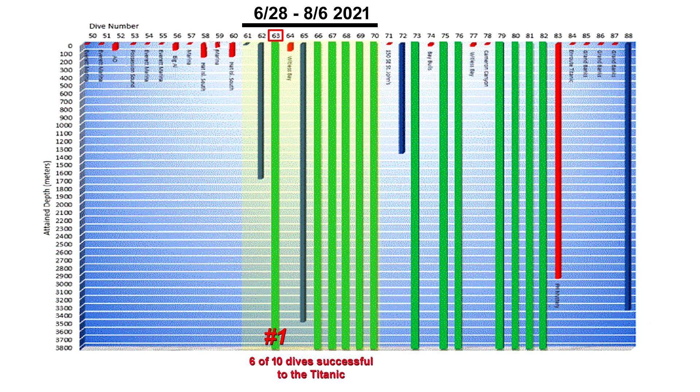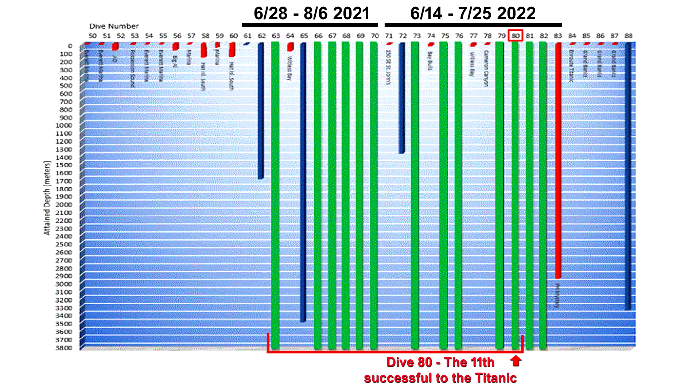The OceanGate dive logs have Titan successfully making it to the Titanic for the first time on July 9th, 2021, which was dive number 63. There must have been quite a celebration on the ship that night. When counting dives of the 2021 and 2022 seasons, Dive 80 would be the 11th successful dive to the Titanic.

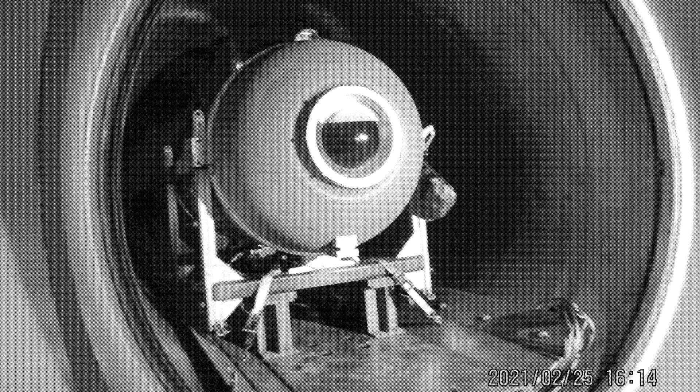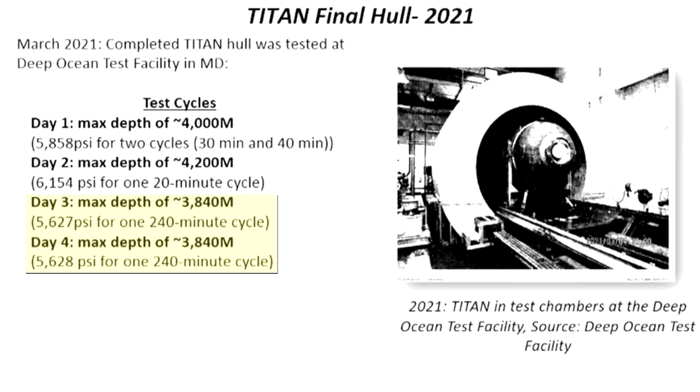If we want to count up how many times this hull was stressed to a deep pressure, up to and including Dive 80, we need to add an aborted dive in 2021 to 3,500 meters. And let's throw in the 4 test chamber dives completed in March of 2021 in the Deep Ocean Test Facility. These tests stressed the hull with simulated dives to 4,000, 4,200, and 2 dives to 3,840 meters.

So now we understand the number of pressure cycles the Titan hull completed at Dive 80. It was the 16th time the hull had been stressed to a deep pressure of over 3,500 meters. Now compared to the version 1 hull, which had fibers popping like crazy, the version 2 hull was very quiet in terms of loud pops of carbon fibers breaking. For fun and some perspective, let's play some clips discussing the first hull. Here's Stockton Rush talking about it during a talk in 2022.

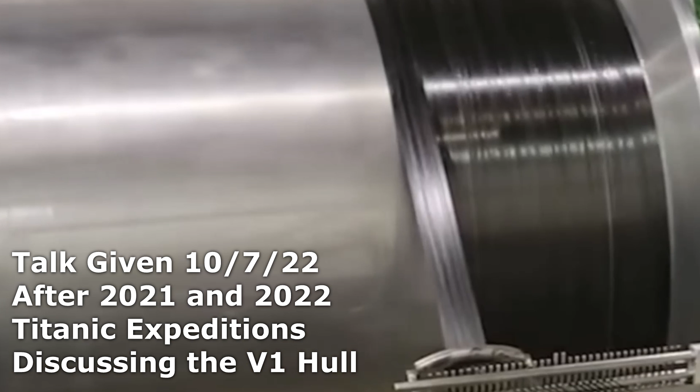We made one hull. I took it to 4,000 meters, and it made a lot of noise, which is a very sphincter tightening experience. And it wasn't getting quieter on the second dive. It should have been dramatically quieter. If you think about it, when you get to these maximum pressures, you get a lot of popping and crackling. And the next time you go to that pressure, you should have a lot less. All those weak fibers and voids have all been taken care of. And this hull wasn't doing it. So we scrapped it. We went back.

We built another one. Here is Stanley, who was on the second manned dive with Stockton during version 1 Bahamas testing. He is talking about the noises in an interview just a couple of weeks after the tragedy.

He told us before the dive to expect loud noises that he had heard on his first dive. He described them as fireworks. I would say small caliber gunshots, same difference.

This is Mr. Stanley discussing it during the Coast Guard hearings.

You know, the sound of a carbon fiber band breaking when it's in a 5-inch thick matrix is a lot of energy being released. And we were all clearly a little unnerved, but he had warned us. But you could actually tell when we got to deeper water the cracking sounds would amplify, which is even more concerning. There was kind of like a grand finale of cracking sounds as we were getting close to the surface, which, I'm not a carbon fiber expert, but just thinking about it logically, the only way that you get a whole lot more cracking when you're coming back up is stored energy that was then released as the pressure was released.

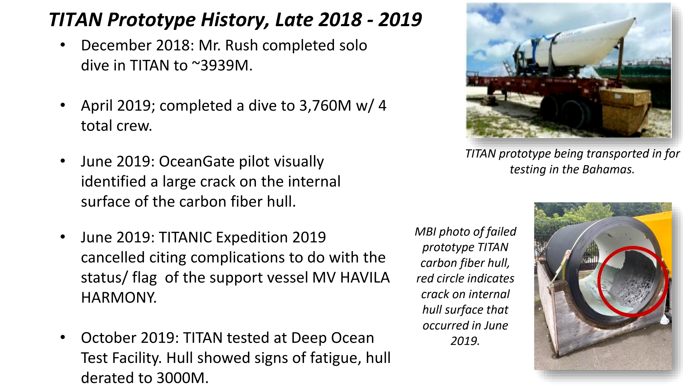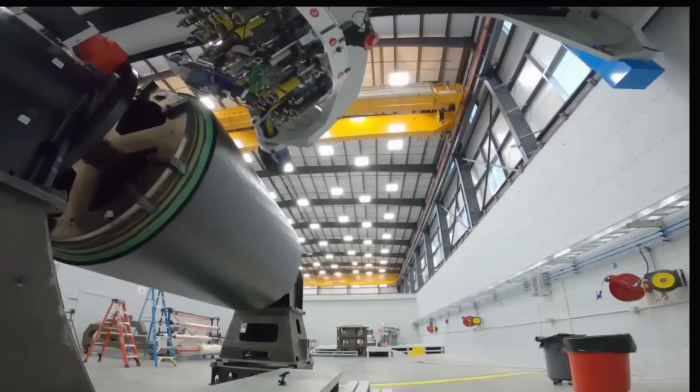Okay, the first hull was a nightmare. We all know that. We are going to circle back to something Mr. Stanley said, so keep watching. The second hull was nothing like this. It was behaving great in 2021 and 2022. It was really quiet. No fireworks or gunshots like we just heard was coming from the first hull. I'm sure that Stockton was thrilled with the new design.

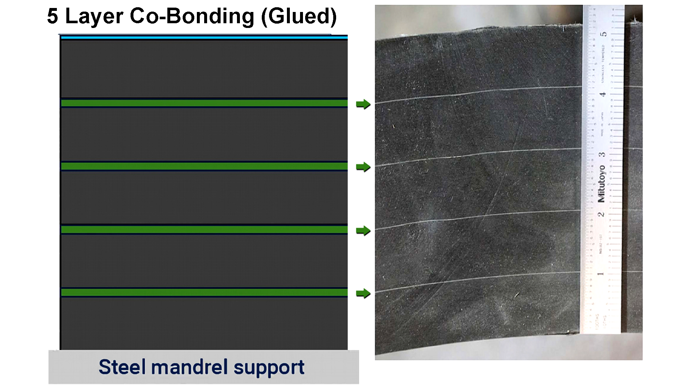He must have thought the co-bonded technique was a real success. The second hull was quiet, and Renata Rojas was a mission specialist on a successful dive to the Titanic on Dive 81 in 2022. This was the dive after the loud bang was heard. Here's what she said about the hull.

Did any noises like that ever occur on the dives you were on? No, the hull was extremely silent. And then throughout the dive, it's just silent. So you never heard any noises while you were... Not at all. You could hear a pin drop.

So again, if you are someone who thinks the hull was severely compromised during dive 80, note that the hull was really quiet and dove successfully after dive 80. More on that later. Now to the loud bang. Let's listen to 3 excerpts of testimony about hearing the loud bang. Here is Phil Brooks. Let's get his report first.

Were you aware of any acoustic anomalies that occurred either during any dive or upon surfacing? The only thing that I remember when we had the loud bang, we were pretty concerned about that, and that did produce AE activity. It was at the end of the dive after it had been on the surface for quite a while. It seemed like maybe 10 minutes or so, and that did produce quite a bit of AE activity.

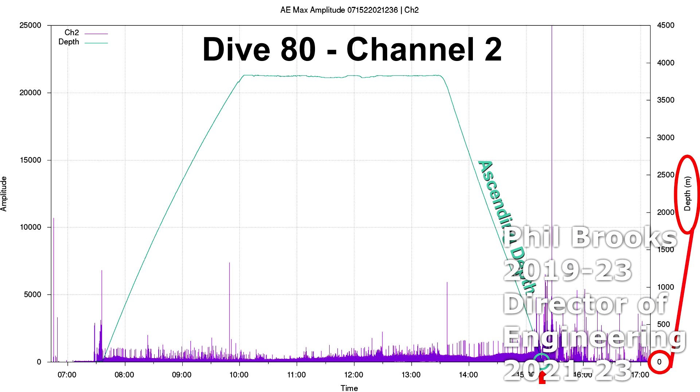Now, Phil Brooks said they were at the surface for about 10 minutes before the loud bang, and the acoustic data backs up that timeline. Look how the depth data shows them at 0 depth on the bottom timeline, but the acoustic event happens after they were at 0 depth for a while. Fred Hagen was a mission specialist in the sub at the time of the loud bang, and he describes the sound. Mr. Hagen's recollection of when it happened was probably incorrect. They were already at the surface.

Can you please describe what you heard? Well, we were ascending. I don't recall the depth. I think we were fairly close to the surface, but we were still underwater, and there was just a large bang or cracking sound. And of course, sonic events in a submersible are alarming, so we were all concerned that maybe there was a crack in the hull.

Let's hear from OceanGate employee Antonella Wilby. She had degrees in computer science and was working on a PhD and had ROV experience. She was very concerned and talks about Stockton's response to a customer who heard the bang.

About what you know about that dive. I wasn't aware until the next day that anything had really gone wrong. We were going through the debrief, and one of the customers stated that on ascent they heard a bang as loud as an explosion. I later spoke to some of the people who had been in the small boats helping with the launch and recovery, and one of them told me, I recall clearly, they heard it from the surface.

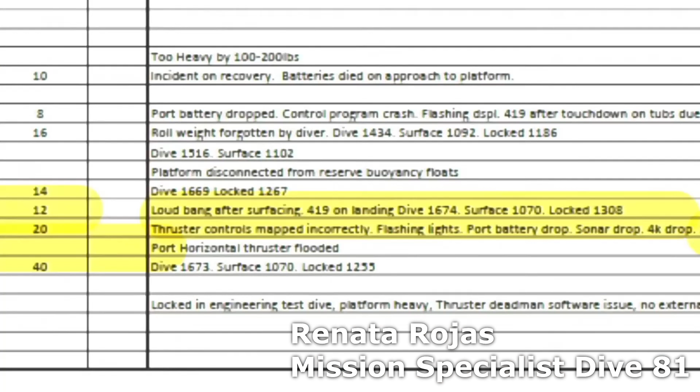In the debrief, it was explained to us, with the change of pressure as you come up, the frame, the top frame that holds the sub, and the legs that could actually be dropped have a little gap.

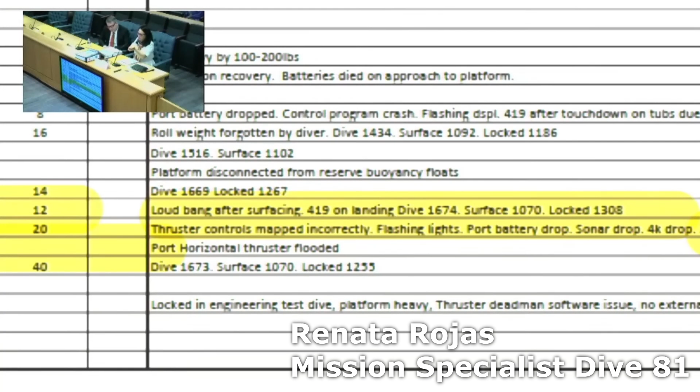And as they came back to the surface, it skipped a little in the change of pressure. And that was the noise they heard. I actually at some point said, I want to go see it. I went down, and you could visibly see the difference between the top of that frame and the bottom of that frame. It didn't seem like there was any damage to the hull.

And what did the OceanGate oceanographer and chief scientist think? What were your thoughts if you were diving in a subsequent dive? Did you have any concerns? Yes, I was concerned and asked their chief engineer, Phil Brooks, if he was concerned. He said that this noise was a concern and that the OceanGate team was focused on trying to determine the source of the noise, and that would influence whether we made future dives.

Did they ever provide you any specific analysis of the real-time monitoring system? No. Okay, we heard stories from the mission specialists and the staff. Let's see what Stockton was actually thinking as per the testimony directly from Phil Brooks.

Stockton did make a comment about the cause of this loud bang, and he thought it was the frame adjusting to the sub. As the sub goes down, it compresses slightly in size, and as the sub compresses, the frame does not. Since the frame is hard bolted to the rings, as it comes back up, the frame may have sprung slightly, and then it adjusted back to its original shape. And that was Stockton's theory of what that bang was: the frame readjusting back to its original shape.

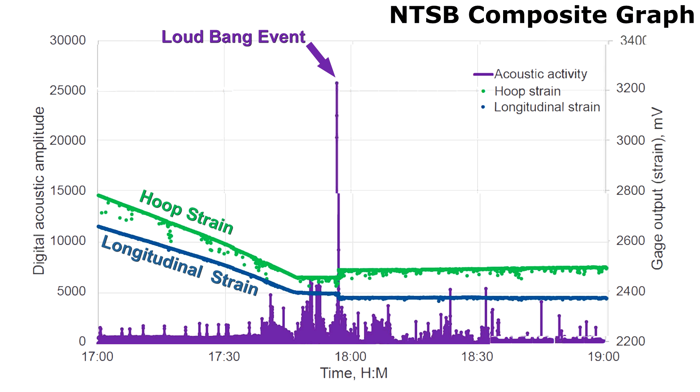So Stockton's explanation for the loud bang was the hull jumping in the frame, and you heard all the guests and some of the staff repeat that story. The troubling thing was Stockton and Phil had real concerns about the shift in the strain data, and they were not forthcoming with this information. The bang and the strain events coincided. Let's analyze strain on the sub. When plotted together, one can see that the sudden change in strain gauge readout coincides with the large acoustic event.

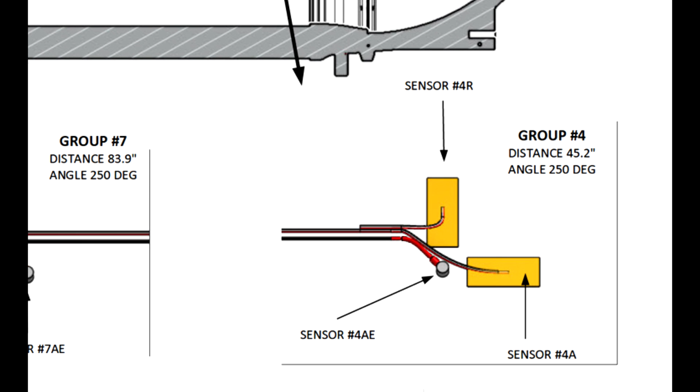Before we get into more testimony about Dive 80, this is a good time to discuss strain gauges, how they function, and how they were implemented in the Titan. This background information will help make sense of the remaining testimony. A strain gauge is a fascinating device. It's based on a fine continuous line of a conductor cut from foil. It works due to the fact that a metal conductor, when elongated under tension, changes the cross-sectional area to become less, which creates more resistance. This resistance is measured in ohms.

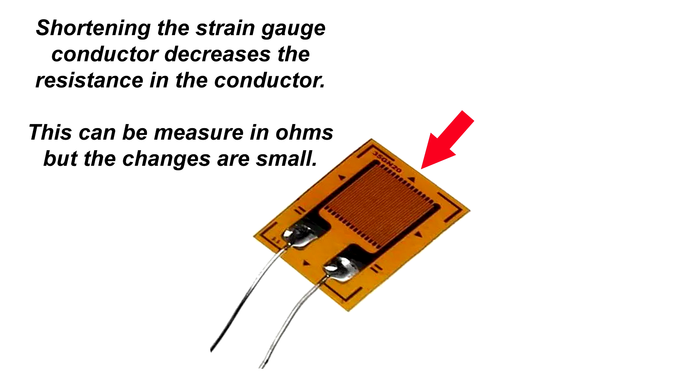The opposite is true. The conductor creates less resistance when it is shortened with compression because the cross-sectional area enlarges. When you bond the gauge to the surface of a structure for which you want to measure, changes in the length of the structure also change the length of the strain gauge. A single strain gauge has to be in the axis of the movement of the structure that you want to measure, and then there will be changes in its resistance, which would be measured in ohms.

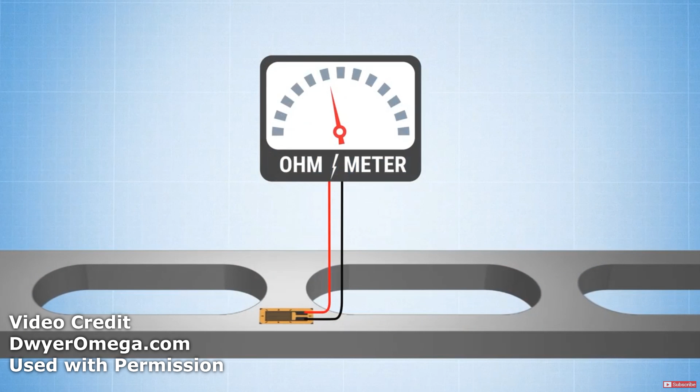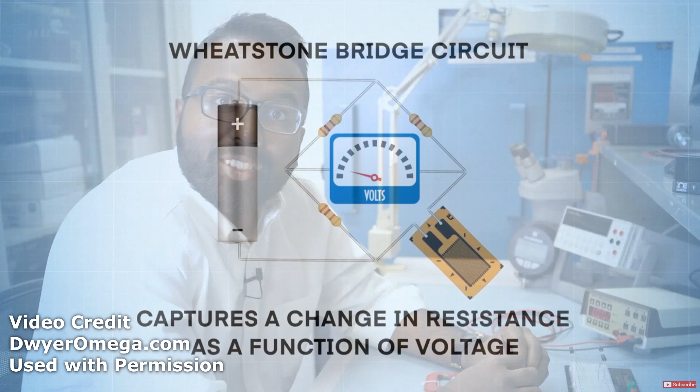But the changes in the resistance of the gauge, either increasing or decreasing, are so minute you could not effectively plot the changes. So the trick is to use devices that put the strain gauge in a circuit called a Wheatstone bridge. This converts the changes in resistance seen by the strain gauge to readings in millivolts, and this voltage can be amplified to get a range of readings that can be plotted effectively. Let's watch a strain gauge in a lab setting. This is a strain gauge bonded to a piece of metal, and one end of the metal is clamped to a table.

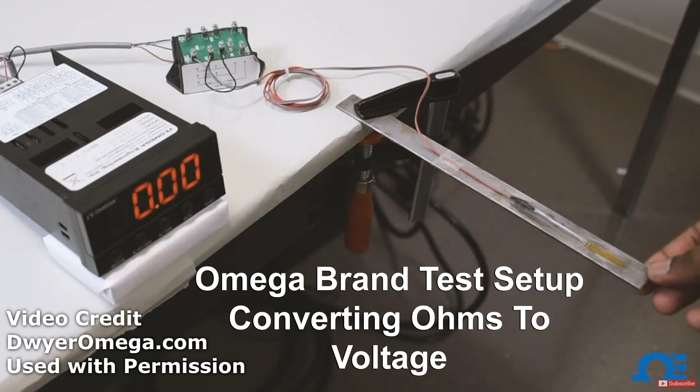This is a wider view showing the strain gauge wired to a commercially available Wheatstone bridge, and also a display that can show the millivolt fluctuations in real time. When the metal is pushed downward, this elongates the strain gauge, decreasing the cross-sectional area of the conductor, increasing the resistance in the gauge, and in this demonstration, they are representing the deformation in negative millivolts.

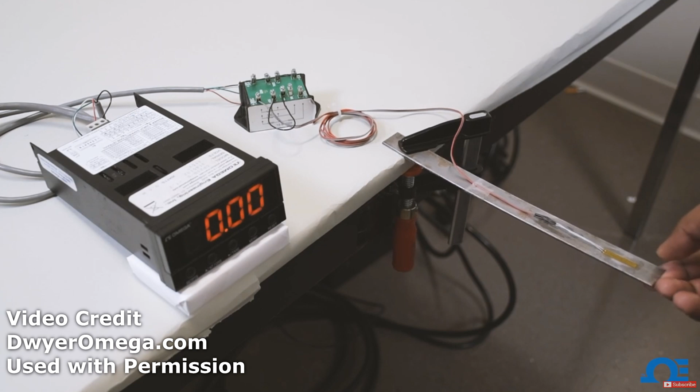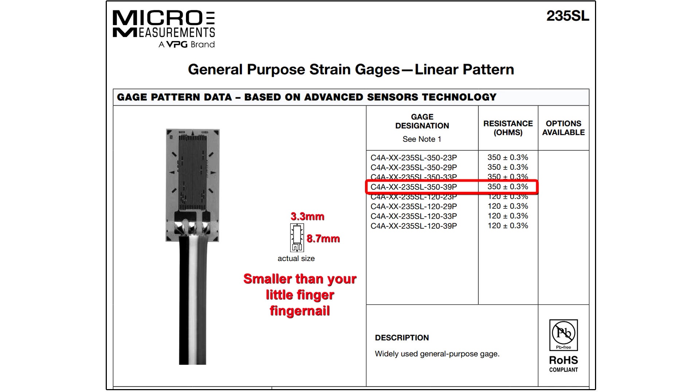When the metal is pushed upward, this shortens the strain gauge, increases the cross-sectional area of the conductor, decreases the resistance in the gauge, and in this demonstration, they are representing the deformation in positive millivolts. The Deep Ocean Test Facility document has the exact model number of the strain gauge they used. Note that this gauge is smaller than your little finger's fingernail.

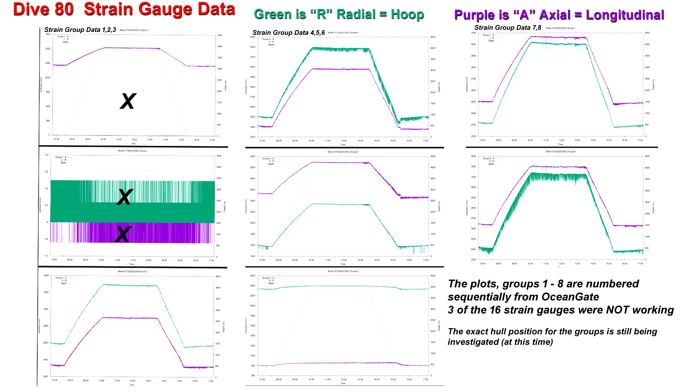They were glued to the inside surface of the hull and one set to the rear titanium ring. So all the plots you see represent movement of that inner surface. There were 8 sets of 2 gauges that were hooked up to hardware and software to collect data on a computer in the sub. 3 of the 16 gauges were not working.

Note that there is some confusion about the group plot numbers versus the position in the hull. This is due to the fact that at the Deep Ocean Test Facility, the sub had 2 strain gauge groups on the front dome. These were moved to the hull for the actual Titanic dives, and the numbering for the positions was changed from what's on this document.

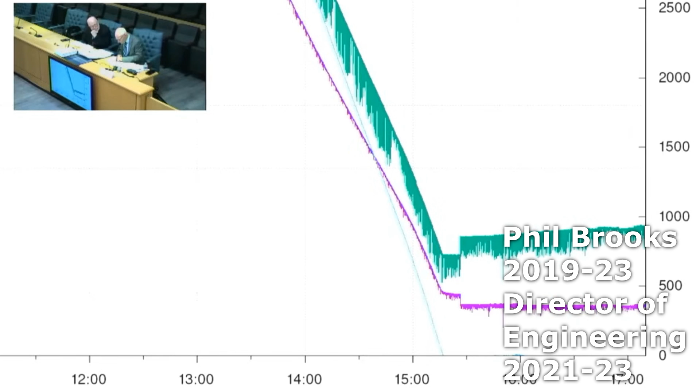Where this can get a little bit confusing, there were some changes made to the strain layout. The AE gauges were the same, but the strain layout was changed because for DOTF we had strain gauges out on the viewport. Those were removed. After that we had all the strain and AE gauges together, and so the groupings may be a little bit different. I believe the placement is similar, but the numbering is different.

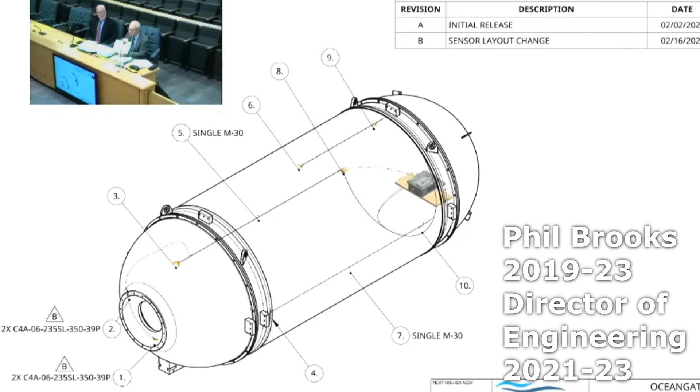On the inside of the sub, this is how the installation looked. The sensors were fixed to the inside surface of the hull in the space under the insert, and the wires ran to the back of the sub. The strain data can start an interesting conversation about the engineering of the carbon fiber hull and the titanium rings. Group 1 is missing hoop data, and Group 2 is not working at all, so we can't use that data.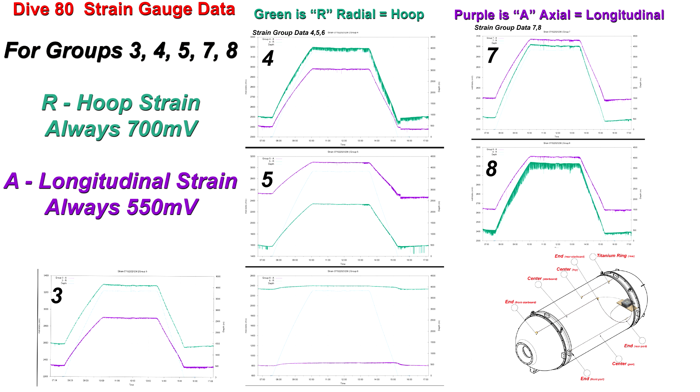Now, groups 3, 4, 5, 7, and 8 might be confusing because the green and purple plots flip, and the baseline millivolt reading starts at different levels. But the delta, the difference in millivolt changes between the surface and full depth, is the same at all positions. The radial delta is always about 700 millivolts, and the axial delta is always about 550 millivolts. That is fascinating because some sensors are closer to the rings and some are in the center of the hull, but the strain change was the same throughout the entire length of the hull.

The Group 6 data looks completely different. The starting voltages for hoop and longitudinal strain are very different for some reason, and for each, the change in voltage is only about 30 to 40 millivolts. These may be the strain gauges on the rear titanium ring.

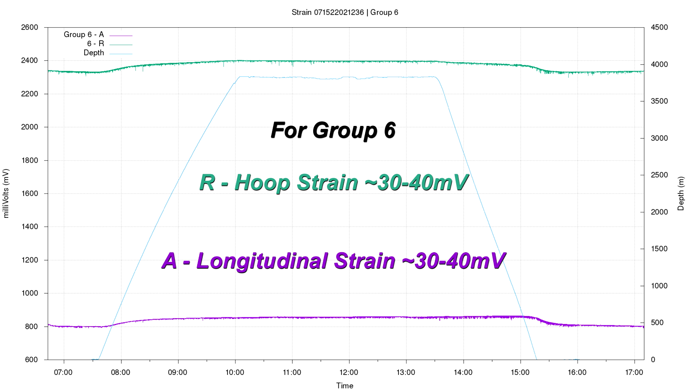If OceanGate used the same settings for this group as it did for those on the hull, it would mean that the ring was much stiffer than the carbon fiber hull. If that were true, that could be a problem, but we just don't have enough information about this group to know why it looks so different. Hopefully we will learn more in the final NTSB report.

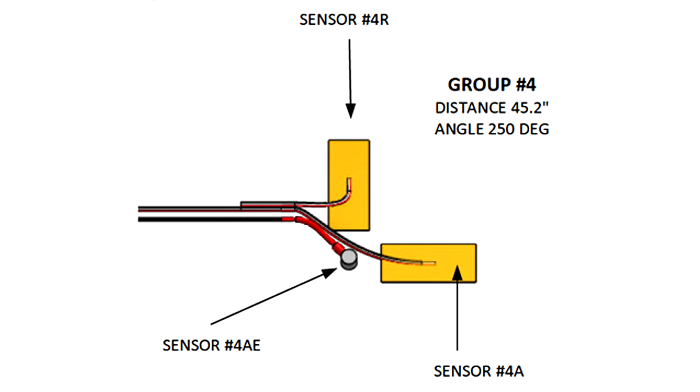The engineer who designed the strain gauge system for the Titan could make choices in the setup, like the amount of amplification of the voltage and the direction of the plots. None of that matters to us when we look at the plots. We know that they mounted strain gauges at 90 degrees to each other so they could measure in the direction of the hoop and the long axis of the hull.

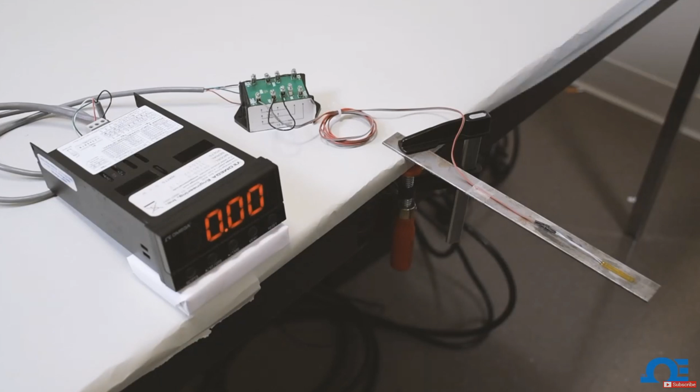Let's look at a sample plot. The blue line tracks dive depth from shallow to deeper. The green plot is radial or hoop strain, and the purple plot is axial or longitudinal strain. Thinking back to the strain gauge we saw working in the lab, you see some choices that OceanGate made.

First, they amplified the voltage to have a good range for the plots. Also, the starting point voltage is not zeroed out. The plots start in a positive millivolt range. This one in the 2000s, others at different levels.

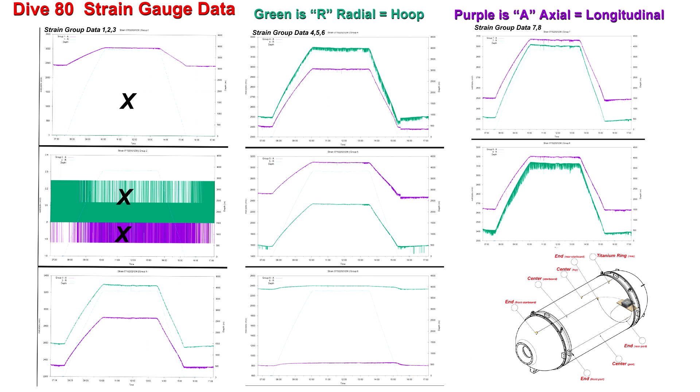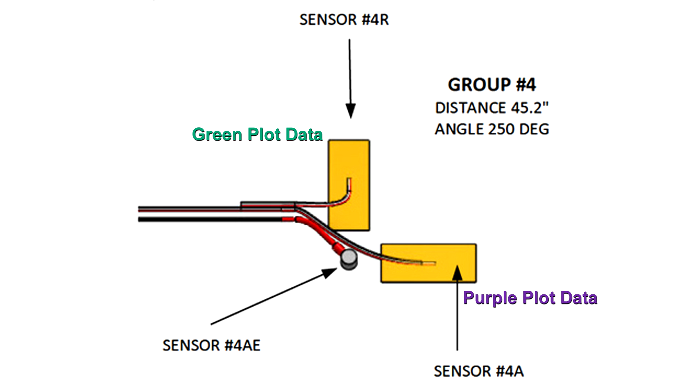And the radial strain, which is green, starts at different points than the axial strain, which is purple. And they chose to plot all of the gauges in the positive direction. The reason I brought up plotting all gauges in the positive direction is because when I think about the inward deflection in the center of the hull and the fact that the gauges were mounted 90 degrees to each other, I would expect the axial gauge to be stretched and the radial gauge to be compressed.

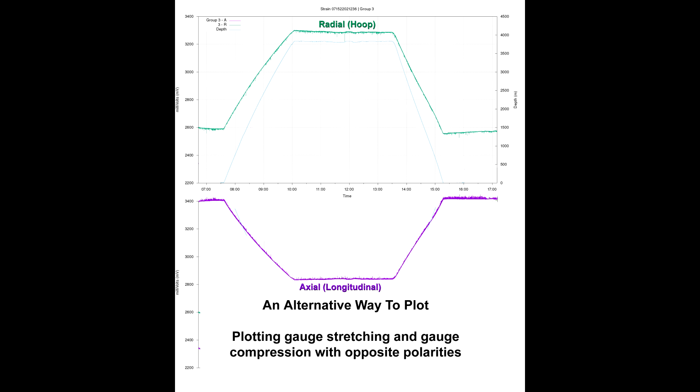Therefore, thinking back to the strain gauge demonstration in the lab, an alternative way to plot the strain gauge data would be to distinguish between the two directions by plotting different polarities. OceanGate did not do this. They plotted both in the same direction, and that is fine as long as they understood their overall plan.

For the Group 4 gauges, the change in voltage for the hoop strain gauge from the surface to Titanic depth was approximately 700 millivolts. The change in voltage for the longitudinal strain gauge was approximately 580 millivolts. So Mr. Brooks felt as long as the plot was smooth, he was not concerned. So what I looked for in strain data was the linearity with depth, that if it went nonlinear with the depth profile, that was something to be concerned about.

So the jump in the strain on dive 80 did not concern him, but we will see from Dr. Kramer's testimony later that this simplistic analysis of the data may have caused OceanGate to miss something important regarding the health of the hull. Unfortunately for Mr. Brooks, whose strength was not mechanical and materials engineering, OceanGate put him in a bad position when it came to strain analysis. Dr. Kramer came to the hearings to question Mr. Brooks, and then a couple of days later, Dr. Kramer would testify himself. Let's listen to that line of questioning.

You mentioned that after a dive, you were the first to look at the data. I didn't hear you say exactly what your responsibility was in the analysis of that data. Really, my main task was to just get it out to everybody as soon as possible, make sure that the plots were done correctly and emailed out. I know we've talked about your qualifications to evaluate that data. Did you have any concerns about the qualifications of OceanGate to evaluate the data? Now, they were emailed to Bob, and I don't know if he showed them to anybody, but yes, that was a concern of mine. And was there any discussion about reaching out to an external laboratory or contractor to maybe do a deeper dive on the stress strain and acoustic emission data? No, there was not. Discussed it with Stockton, and he said, oh yeah, it's probably the frame.

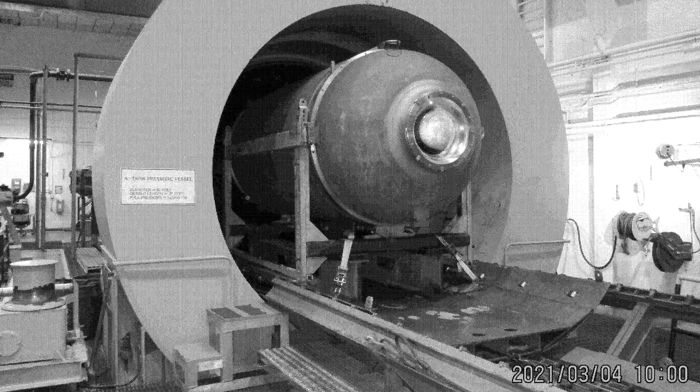We have no baseline for what these voltages mean in terms of actual movement of the inner surface of the hull. For strain monitoring to be useful, the millivolts of change needs to be correlated with actual movement of the hull through testing. Data from the first hull was worthless. Data from the scale model testing was worthless because they both failed at around 2,800 meters. So the only data they had was deflection measurements they made at the deep ocean test facility dives. And amazingly, Mr. Brooks seemed to be unconcerned about that data because he failed to bring those numbers to provide them in his testimony.

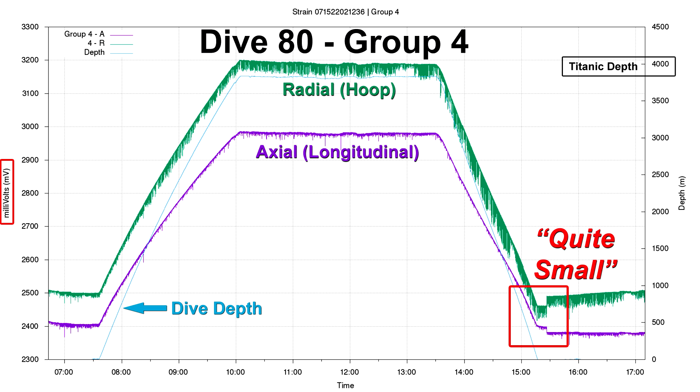I am surprised about this lack of emphasis on the physical movement, because this is crucial information to understand the dive 80 strain change.

There is also no testimony about correcting the strain gauge sensitivity for the changes in hull temperature, so that is another variable that we do not have enough information about. However, I found a pearl in the testimony. In the multiple days of testimony about the Titan, there are about 3 sentences in Miss Wilby's testimony that finally give us an idea of the amount of movement we are talking about. This is at a time when this information was still fresh in Mr. Brooks's memory. Listen to this.

So I did bring up delamination to Phil as could that have been something indicated in these data? And he said, well, it was only a few microns. And so just the difference of a few microns, it seems somewhat meaningless to me without a further context of where it was. Just because that sounds like a small number doesn't mean that that's not cause for concern. It also appeared that, like, I certainly am not an expert, but it didn't appear that anyone else aboard had specific expertise in composite materials, nor did anyone employed at OceanGate at the time seem to have any of this expertise.

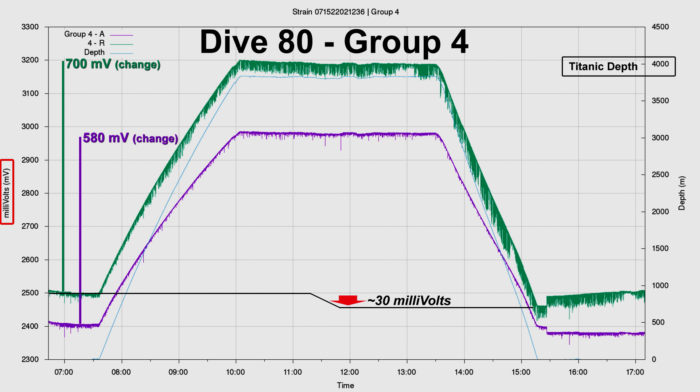Remember I told you we would circle back to what Karl Stanley said about his Bahamas dive and the hull storing energy from being deep and releasing it when it got more shallow? Kind of like a grand finale of cracking sounds as we were getting close to the surface. More cracking when you're coming back up is stored energy that was then released as the pressure was released.

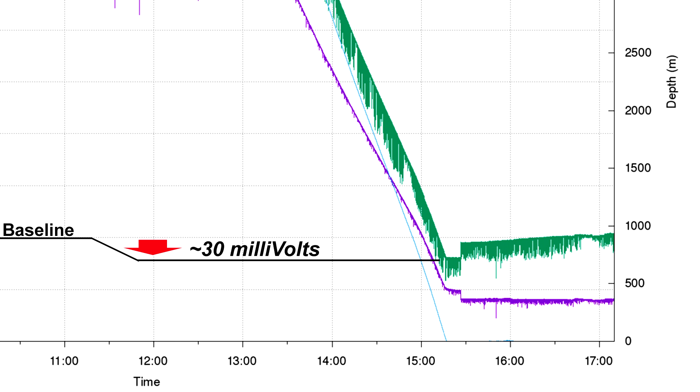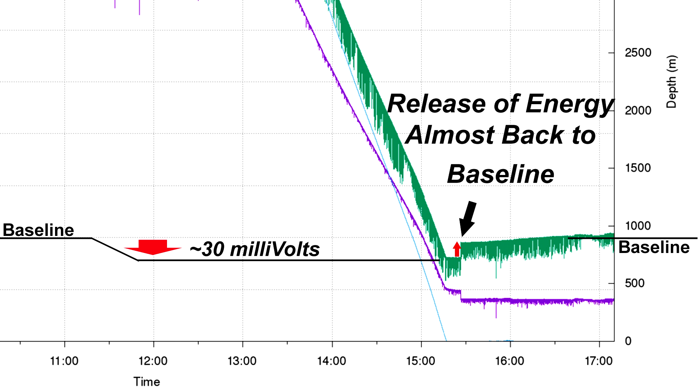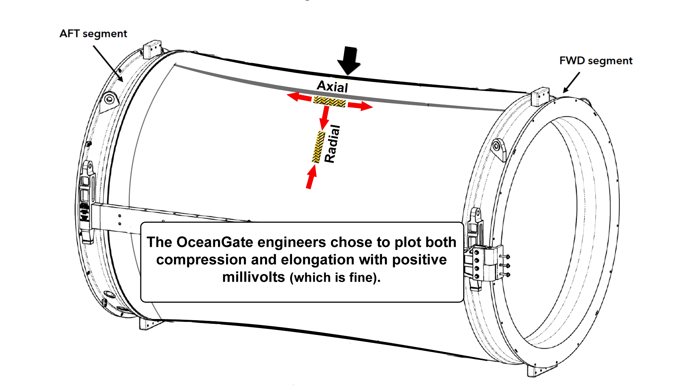When they surfaced on dive 80, the group 4 strain gauge was deflected approximately 30 millivolts to the other side of baseline. This is stored energy. When it released, it caused a loud bang. Some said it sounded like a large crack or a small explosion. The folks in the dinghies on the ocean's surface heard it, so it must have been loud. And in group 4, the axial strain gauge released energy, but in an opposite polarity. That is interesting and confirms my point that I wish I knew how OceanGate set up the polarity for the strain gauges mounted 90 degrees to each other.

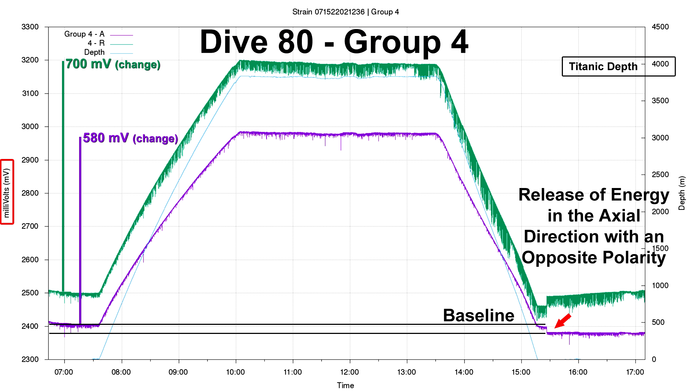And remember, 2 other strain gauges, 3 and 5, registered strain changes also. So even though this is interesting and gives us some basic idea of the degrees of movement at the strain gauges on the inside of the hull, if this represents a delamination, we don't know in what layer of the hull or how far away it is from the gauge groups. We are also at a disadvantage because the strain group locations by the number are not clear. And it was probably ill-advised to continue to dive, but they managed to survive 3 additional deep dives that season with no further bangs.

And I asked if they were going to continue diving the sub or if they were going to stop the operations until they figured out really what had happened. And he said, well, we'll do the next 2 dives on mission 5, and then when it gets back to Seattle, we'll do a visual inspection. In addition, in dives 81, 82, 83, we didn't see any more abnormal strain and AE data or any noises, any loud bangs. So that was the other reason for continuing ahead.

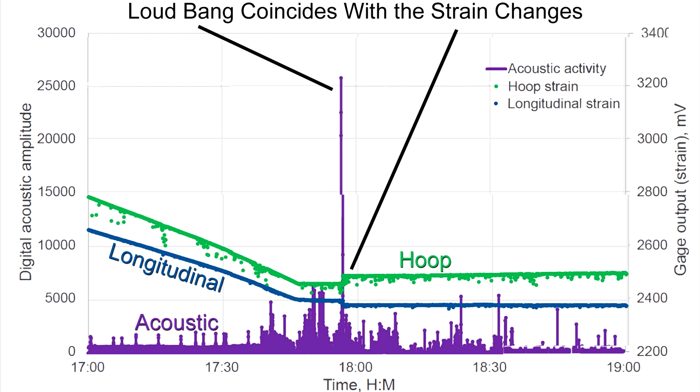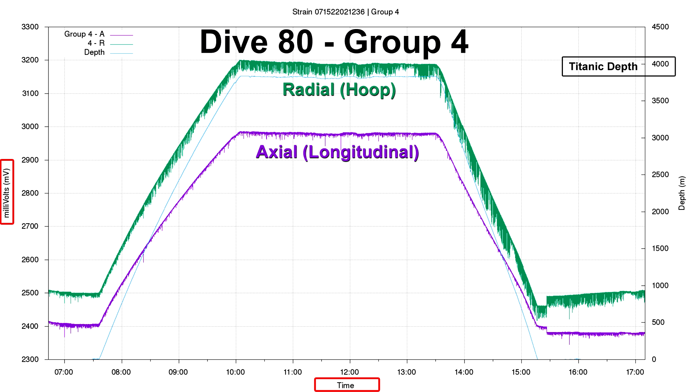There is one final controversy to discuss about Dive 80, and this comes from the NTSB and Dr. Kramer's testimony. There is no question that Dr. Kramer doubted the ability of OceanGate to understand their own data and use it to monitor the safety of the sub. One of the things that Dr. Kramer realized is that OceanGate liked to look at its strain data plotted against the elapsed time of the dive, so time was always on the horizontal axis, and data to be monitored was on one vertical axis, and the other vertical axis had depth.

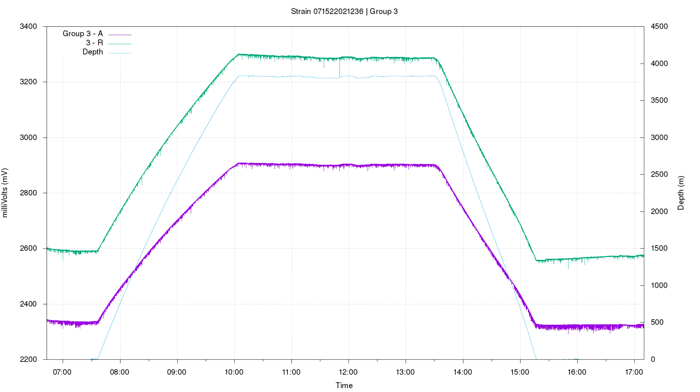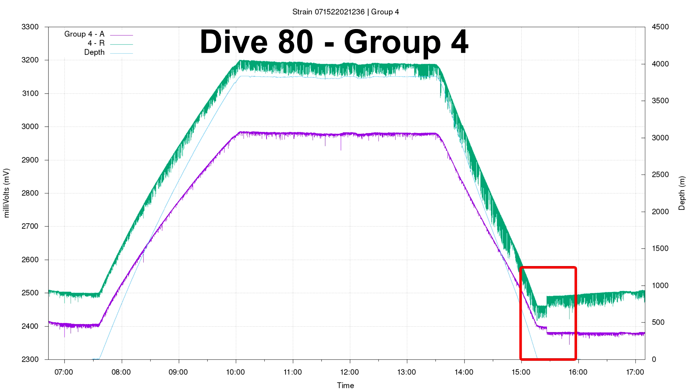So they looked at strain events correlated with depth over the duration of the dive. And Phil Brooks only watched to see if the curves were smooth. And on the face of it, what they were doing made sense. But Dr. Kramer, being a materials science guy, saw the flaw. He realized the way OceanGate was plotting the data was making it difficult to see the real problem with Dive 80. The key was to plot strain data directly against depth.

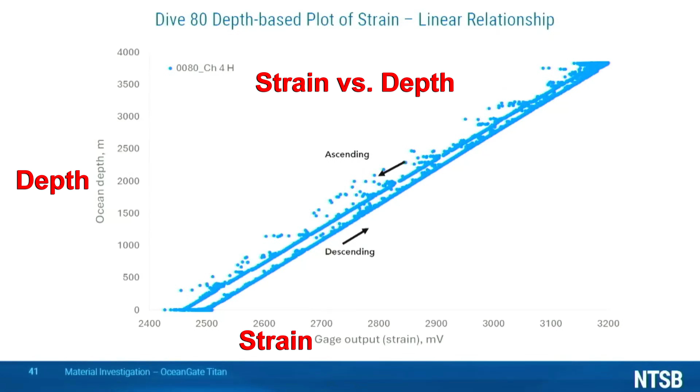As he said in his testimony, it is more akin to a stress-strain plot, which is a standard way of visualizing this type of data. OceanGate strain data was typically, and perhaps always, plotted as a function of time. The changes in mechanical response are easier to visualize by plotting the strain against dive depth, as shown here for the hoop strain at gauge group 4. Plotting the data in this manner is more akin to a stress-strain plot, which is a standard way of visualizing

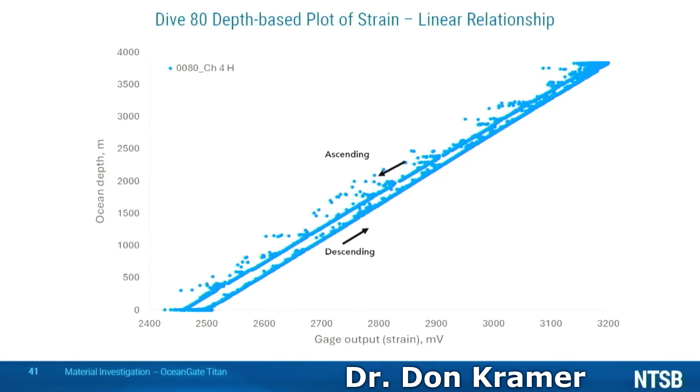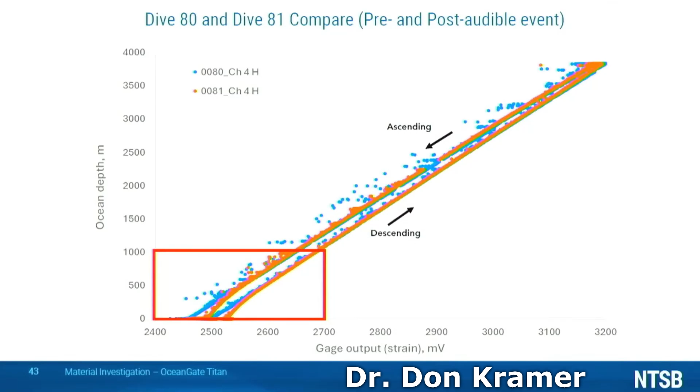this type of data. Moving forward in time and looking at dive 81, the dive immediately after the event, we see a change in the initial strain response of the hull. The next slide focuses on the initial and final 1,000 meters of the dive. Dr. Kramer's next slide is busy because it includes 5 dives. For clarity, I modified it with labels and removed the light blue plot for dive 80.

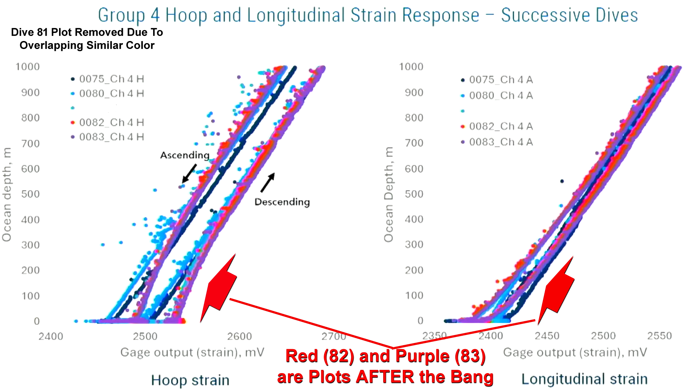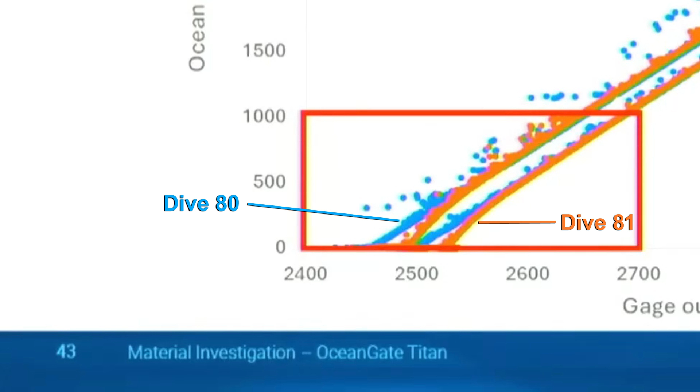The graph on the left shows the hoop strain, and the graph on the right shows the longitudinal strain. Changes in the initial strain response are seen in both directions. Furthermore, the changes persist from dive 81 through dive 83, which is the last dive for which we have strain data. When I saw Dr. Kramer's testimony with these plots for the first time, I thought it was genius and that it found the fatal flaw, because it made it clear that the hull was behaving differently after dive 80.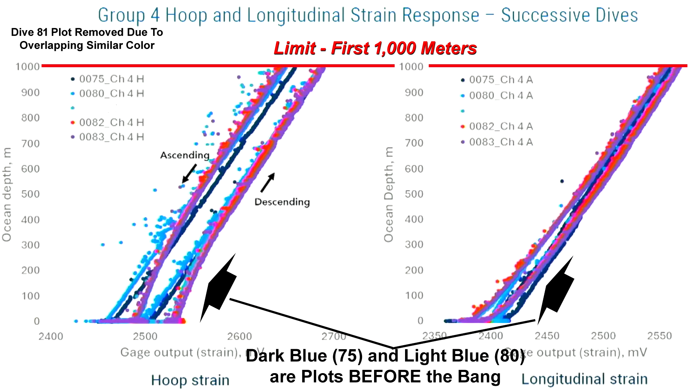But when I thought about it further, it occurred to me that this looks bad because he is zooming in on the first 1,000 meters of depth. Then I looked at other plots that were part of the NTSB report, but not in Dr. Kramer's presentation. I began to think that this may not be a big deal. Here are some plots from the NTSB report that add questions to the significance of this data. This plot of group 5 longitudinal strain is nonlinear between the surface and 800 meters, and then the strain corrects back to pre-dive 80 strain. So is the hull moving back into position?

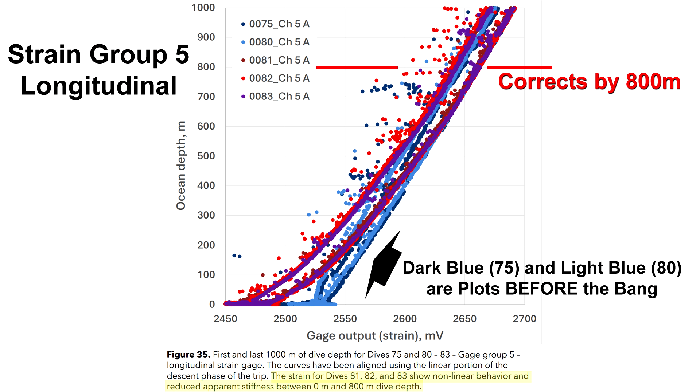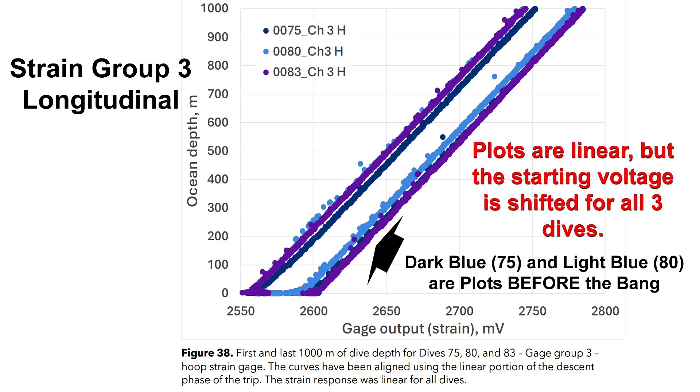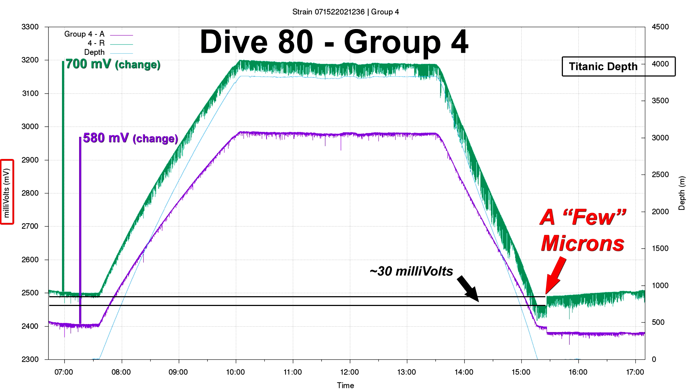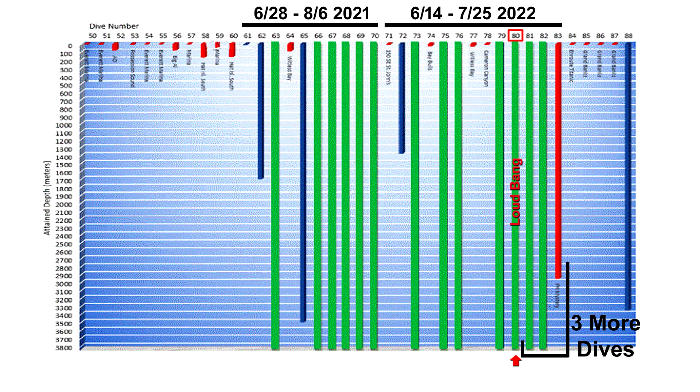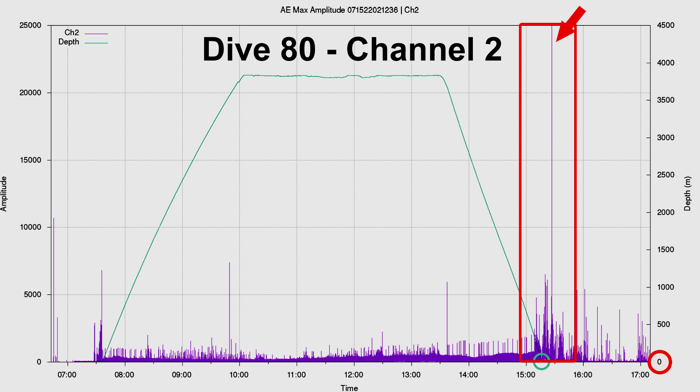Furthermore, when considering all these plots showing variations within the first 1,000 meters of a dive, remember, Brooks and Rush believed movement at the strain gauges on the inner surface of the hull was on the order of a few microns based on data they had from the Deep Ocean Test Facility. And finally, the hull did not implode during the next 3 deep dives and made no further loud sounds. So for all of you watching that think the loud bang at dive 80 is the smoking gun and caused the flaws that led to the implosion, what I would say is not so fast. It may represent hull damage, but not quite the fatal flaw.

There are 2 significant things that happened after the 2022 season that may have something to do with the implosion in 2023 on dive 88. The fact that they left the Titan outside on the dock in Canada during winter temperatures that went below freezing. This is a huge problem if there was any unrecognized water intrusion into the carbon fiber. The second thing is the absolute trauma the sub was subjected to on dive 87 during the 2023 season, the dive before the fatal dive. That will be the subject of another video.